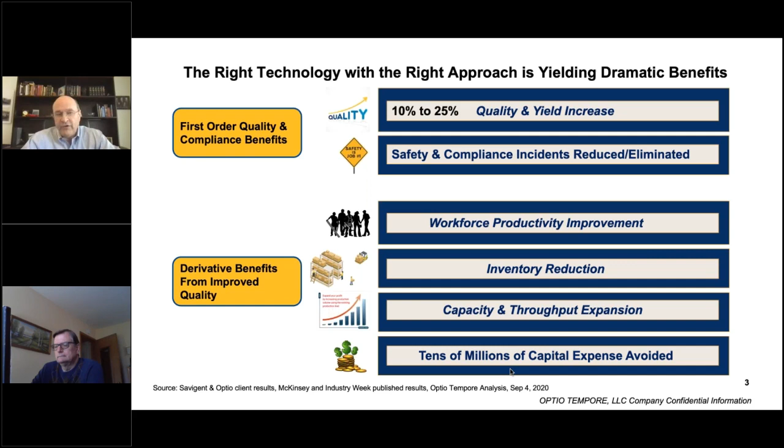But this audience is long time quality experts and professionals. You know that there are a lot of derivative benefits if you improve the quality. Things like workforce productivity improves as well. It enables inventory reduction, capacity throughput. If you're making it right the first time, you have less rework, your workers are more productive, your inventory can be reduced, and you get more through the factory. So I think we've seen this have really dramatic impacts with clients.

So the first situation that we want to talk about, the case study, is with a very global company. It's an agricultural and food processing company. They have over 1,600 sites around the world, and many of these sites were acquired through acquisition. So there's a lot of variety in the operations and in the systems that are utilized, and also many non-standard processes. These sites and operations did not grow up in the same holistic organization.

Many of them had very different origins, and as I said, came through acquisition to be part of this larger conglomerate. So there's a lot of variety, and operators and management lacked timely and accurate information. Inventory accuracy was very low, and the variation in yield and performance across the world was dramatic. There was a great need for a cost and time-effective approach to upgrade these legacy plant systems and to accomplish dramatic and rapid process execution improvement.

So we chose this Savigent software platform because it would enable us to make very rapid development of a manufacturing operations management system, a MOM, for them, that would be of a size and a scope that would work for these many sites, many of which were small, and so it would be too expensive to buy a big package software application for each one of these. But we could build a tailored solution using the Savigent platform and then roll that out quickly.

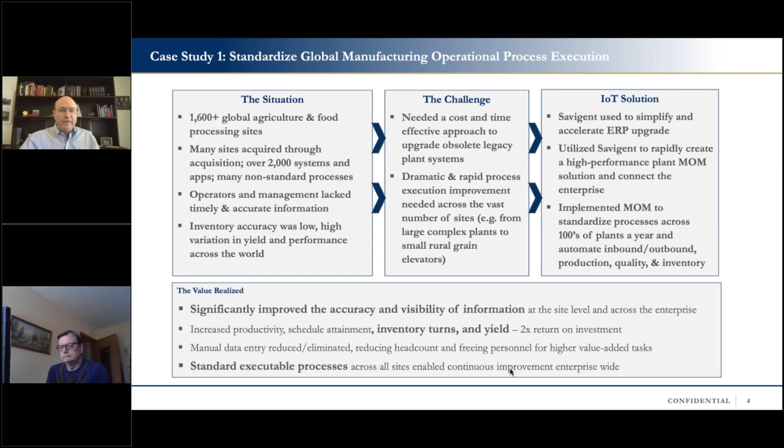So the idea here, there was more to this solution, but what we're going to really look at here in this part of the MOM is a receiving example, but the scope of the implementation was a little bit bigger than just receiving. It was really to standardize operations management, improve control and visibility, integrate information sharing across the global company. There was more to it than the example that we're going to run through here, which will demonstrate a little bit of the IoT piece of it.

But we were trying to standardize those processes and automate certain parts of the process, and then finally ensure rigorous execution of those processes. And we've got a little demonstration to run through here that was critical to their plant performance management improvement, which was all about their receiving processes. Very simple process, right? We've got to receive material and then put it away. In this case, it's going to be bulk liquids. But the point is that when you're doing that across many different sites around the world, it's easy for it not to be done consistently and accurately. And that was the case with this company.

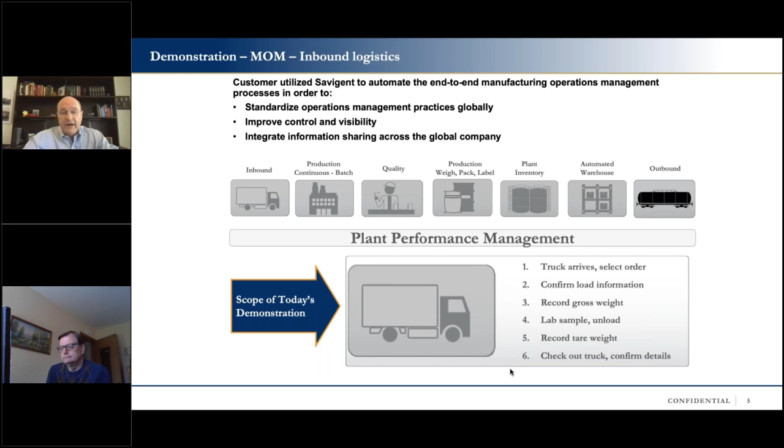So here you'll see two sides of the screen. On the left, you'll see what the operator would see and what he would click on, and then some screens that he would use to ensure that the receiving is done consistently and accurately. And on the right-hand side of the screen, you'll see what would be displayed inside the Savigent tool. It looks like a Visio map of a process, and it is a map of the process, but the difference is that these buttons and icons that represent actions in the process actually do control the process. In other words, it's not just a picture of how you would like the process to be executed, but this is actually a control map of the process.

And as the process proceeds, you'll see the various buttons and icons turn red as it walks through the process. So I'll just point out some of these. This green button is where it'll start. You can see this is select the order. The operator will select the order, and then it'll go through various actions like confirming the truck, weighing the truck, taking a sample from the truck, and then concluding the receiving process. And the whole point here is that by using IoT, we were able to build this standardized process and then effectively manage execution over a very rapid period of time.

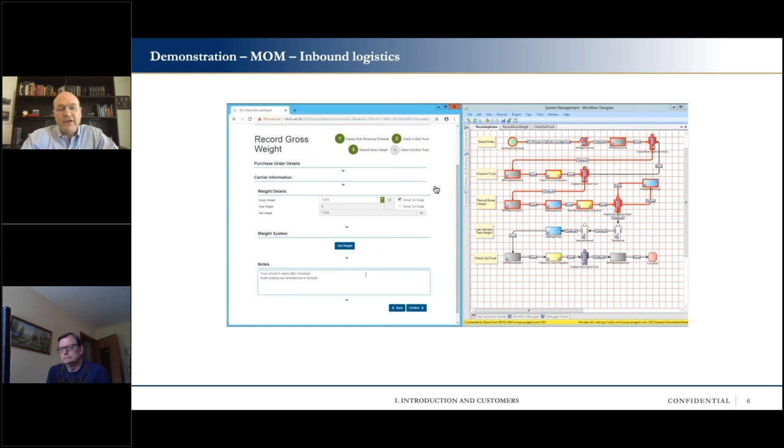There was some fluctuation in the weight, so he does it twice just to make sure that he's got the correct weight recorded. And that's what he's making a note on, that he did that twice because there was some fluctuation in the gross weight. And he makes that note and he clicks again, and again we advance with the process.

And now he's waiting for the sample to be taken because all inbound has to be quality checked. They have to check for content and moisture. And now he's got his sample, so he confirms that. And now he's ready to complete. He's checking over the information to make sure he's got everything. Everything's been entered. He now sees his quality details from the quality check.

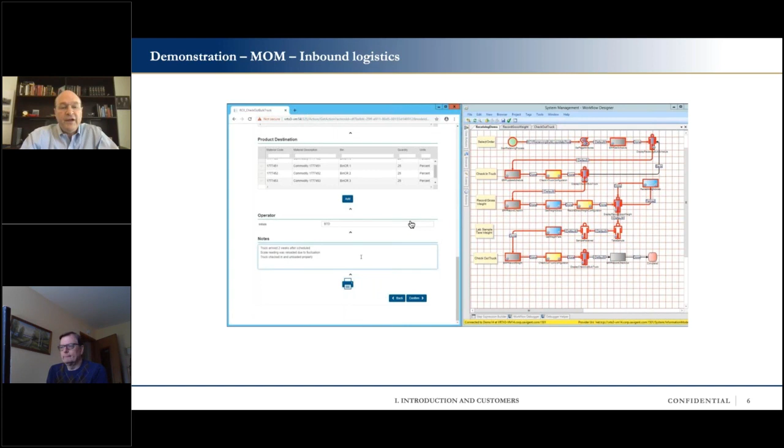And where the product is supposed to be delivered to inside the plant. So now he puts his initials in, that he has done this receipt. He puts a note that it's been done properly. And then he clicks continue, confirm. And he's ready to go on to his next task. So

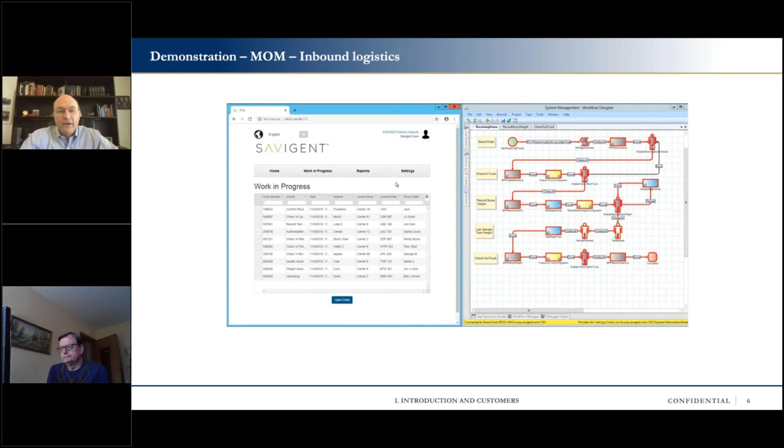that's a little demonstration of, you see a glimpse of the software tool that was used, at least the workflow management part of that tool set that linked to many different systems. It linked to SAP, it linked to the scale, it linked to the quality, plus the operator could make entries, as you saw.

So one of the powers of the solution was that you could link not only the shop floor all the way to the SAP, and you could get the information about the shipment and the truck, but also you could share information to SAP about the weight and the receipt of the order, and also you could interact with plant floor equipment, like in this case a scale. And the impact was dramatic.

Increased inventory accuracy from 50% to near 100% by connecting all these systems and getting this in place and enforcing that rigor on how the process was to be executed, all receipts all around the world at all these different small operations. And as mentioned earlier, which is not uncommon with quality improvement, when you improve the quality of the process and the accuracy, you improved operator productivity dramatically, by 23% as well.

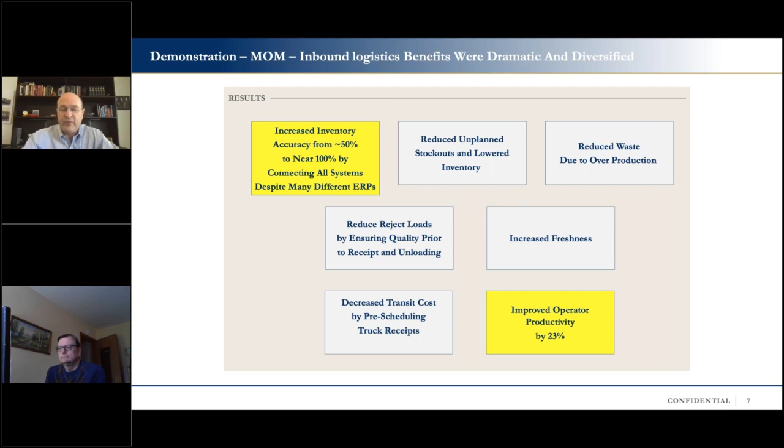And some of the things that were included in the solution were this automated receiving, this scheduling of production, the managing of the inventory, the recording of shipments, these automated updates to SAP, and the impact was dramatic. One of the things to note in a solution like this is making that initial design robust enough to work for many sites around the world, but also having flexibility, because things are different in these very many different sites. The equipment is different, the systems that you're tying into are different.

And so there has to be a core that is common, and enough flexibility to adapt to those local conditions. And that's where you really need a governance process that's overseeing the deployment of this, so that you are careful to protect the core solution, but allow the local adaptation so that it can work for these many different sites. And the Savigent platform was really effective in being able to do that.

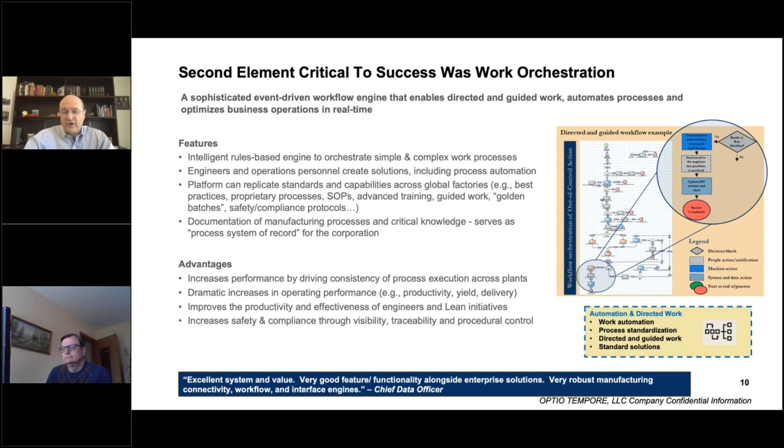And you can get productivity and yield, which we saw, but you also can get effectiveness in the engineers and the lean initiatives. If you think about trying to do process improvement and your engineers trying to improve their processes, this is a tool that can make them dramatically more effective. And finally, you can increase and improve safety and compliance with these tools. So that's the first case example.

The second case example we're going to go into here is a global data storage and data management manufacturer. The plants that we were working with, that Ron is going to describe for us, are a huge wafer fab. So very sophisticated silicon growing and silicon manipulating equipment in these large plants to ultimately make integrated circuit chips. And in this case, we had two sister semiconductor fab plants, Europe and the US.

Rapid changes in the industry were adding complexity to the products and the manufacturing process. Mostly in processes we try to make them simpler and simpler, but in the information technology space with silicon chips, it's gotten to be more and more integrated circuits on a chip, thinner and thinner layers, et cetera. So the number of fab steps moved from 250 to over 2,000. And lead times were extending out from 30 days to 90 days as the product continued to improve. And this was driving large increases in labor and equipment. And there was a need for making large leaps in capability for productivity and yield in order to counteract this, stay competitive, and stay in the market.

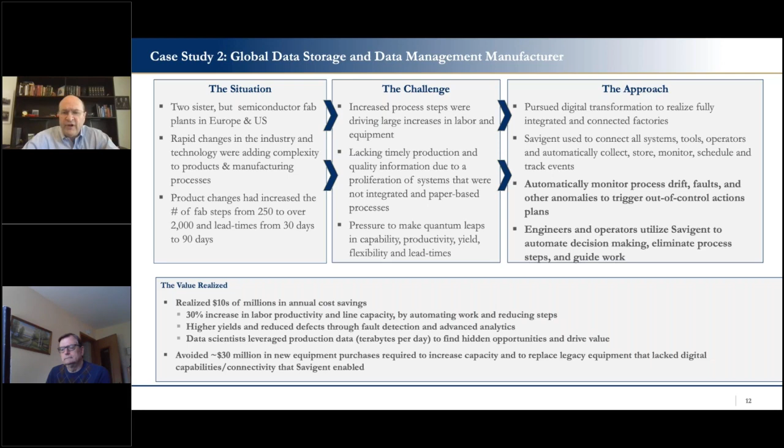And I'm going to turn it over to Ron, and he's going to explain in more detail how they use the Savigent technology to do this monitoring of the process for quality benefit. Here you go, Ron.

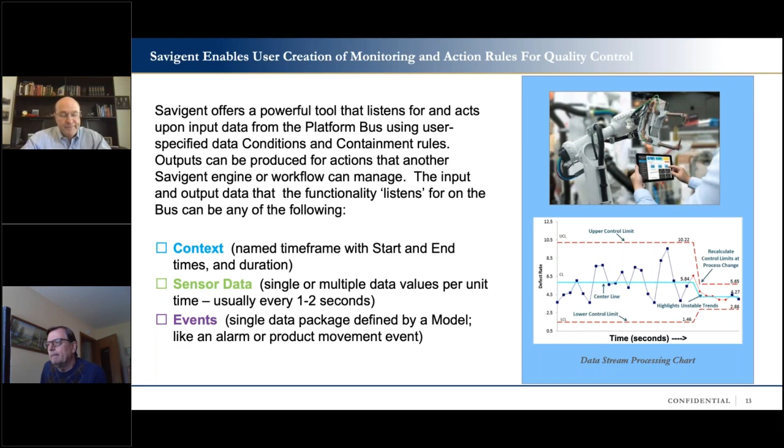So we can also do context data, sensor data, and events. An event is a single data package defined by a model, like an alarm or a product movement event. Okay, so we basically listen for those on the bus. Okay, the next slide. A user can establish and configure sensor data input.

And that alarm can be in whatever format the customer wants, and what's important to him to identify what product was in that chamber during the time that one or more of their critical sensors went out of control as defined by their rules. Okay, and then this other blue one here is a general custom FDC alarm, we call it.

That goes out on our bus, and then another engine that you can develop actually takes that and automatically sends emails out to technicians or engineers that are pertinent to that particular tool or process, telling them about the alarm that happened. So in real time, we can trap for what they call out of control against limit, like in here, these are 11 standard limit processors.

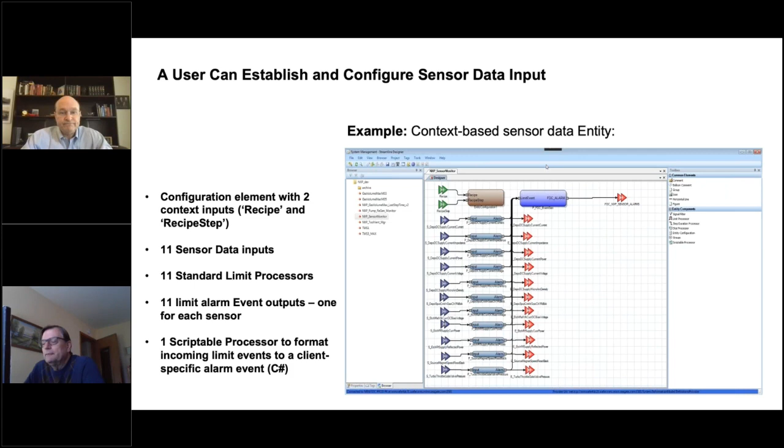And it can be fairly complex if they want, or you can keep it simple, depending on the customer's need. And these are all recorded, by the way, to our Historian Microsoft SQL database system.

So they can go back a whole year in time for any particular tool in the factory and see what the actual data pattern was during all those product runs, day by day, month by month. Okay, now the context conditions can be applied to a Streamline entity for the purpose of having containment rules, as we talked about,

during specific timeframes. Model-based alarms can then be output to our system platform bus for processing by other engines or workflows. So we can interconnect with our own rapid development products as well as the outside world, going to the customer systems as well. These Streamline generated alarms can then notify the customer systems to act upon and thus complete the desired containment response cycle. Also, all output entity data sent to the bus, as I mentioned, goes to the historian database.

Conditions can also be based on other sensor data or even other events being monitored. If no configured rule-based contexts are used, then the rule is applied 24/7. So if your Streamline is running in our runtime system, then 24 hours a day it's monitoring whatever you designed in the inputs to be monitored against your control limits. Now, the source of incoming bus data can be from engines, as we call them in our product, or workflows, which connect with the client network systems, and they supply the relevant equipment data. So we can move to the next slide.

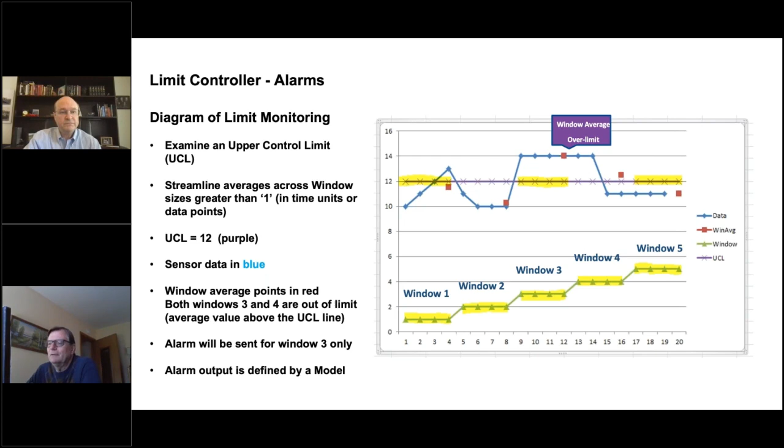So there's an example of how it can save the customer's product by alarming in real time, all very configurable to the desires of the engineer who knows that tool, that process, the most. So that basically covers it.

Another slide. Okay, and here's some custom configuration use cases. We can do oscillation detection with upper and lower peak rise and fall thresholds, and apply a frequency limit over time. So if you see too many peaks going over this threshold per minute, which is configurable, that will dictate an alarm. Or a spike detector, either upper spike or lower spike detection.

You can do custom sensor data creation based on logic applied to incoming sensors. And you can form another sensor to load to our historian database based on one or more real-time sensors coming in. We can do context generation for custom use. So if there's no event from the tool that constitutes a context period that you like, we can base the context on other incoming data to define when a context is going to begin and when it's going to end, within which we do the rule-based comparisons.

And then we have a statistics generator, and we can output that from the data coming in real time. Alarm frequency monitor: we can bring in alarm events from the tools and say, in 24 hours, give me a report on these top 5 types of alarms. How frequently have they been happening day by day? And that's recorded as well.

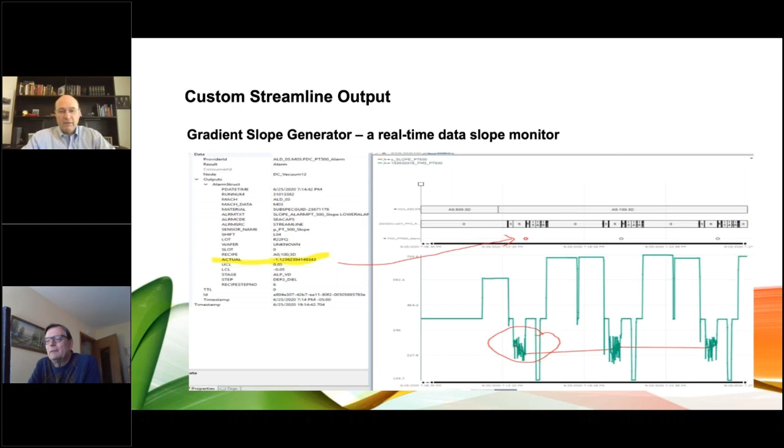Yeah, and so they can act upon it however they want, and it'll be recorded also in the historian database, and that's why it shows up in our charting tool here. So this charting tool shows you we can actually chart not only sensor data, but context data and event data. So that's a good example of a complex one. So that basically covers the Streamline for an overview here.

Yeah, hey, thanks, Ron. Really appreciate that. One of the things I think is particularly powerful about these two examples is the standardization of processes, and then the enforcement of the execution of those processes. A pretty standard, in some ways very simple, application of Internet of Things to empower and strengthen a process that quality improvement people have been using for decades. Here, what Ron showed is being used at this wafer fab for very sophisticated control of very precise processes involved in etching silicon wafers, making integrated circuit chips.

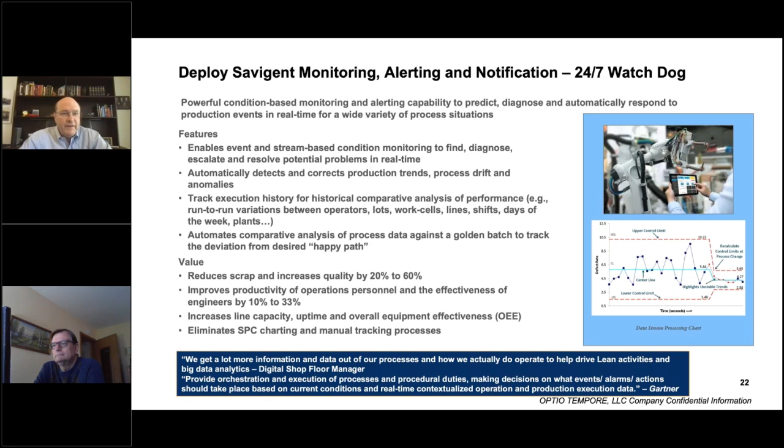And then one of the things about this IoT platform that we used was this smart edge to cloud technology capability that scales. Clearly when you're doing real-time production monitoring, you're going to be at the edge. You're not doing that from the cloud. And in the example that Ron's talking through, those servers are on site, and we're working at the edge, right at the tool, right where the production is happening, to monitor very detailed sensors in that production process.

But also this connects to the cloud for data that you might want to store for later analysis, data that you might want to compile with other locations or compare to other locations. And that's the advantage of being able to work in the cloud as well. And then to be able to scale it. I don't know, Ron, if you know the total number of terabytes that are being handled per day by those sites, but the amount of data that's being processed is just enormous.

Yes, I think it's anywhere between 5 to 10 terabytes at least. Yeah, 5 to 10 terabytes a day. Isn't that right? Something like that. I believe so. Yeah, it's in the terabytes per day. I mean, it's huge amounts of data.

The system is very robust, very powerful. It actually was designed with some proprietary technology in terms of the bus structure and such to enable that many sensors with that amount of data to be processed successfully day in, day out, every day, right in the heart of their production process. So really key. And then the ability to roll out across many sites is really key to this technology.